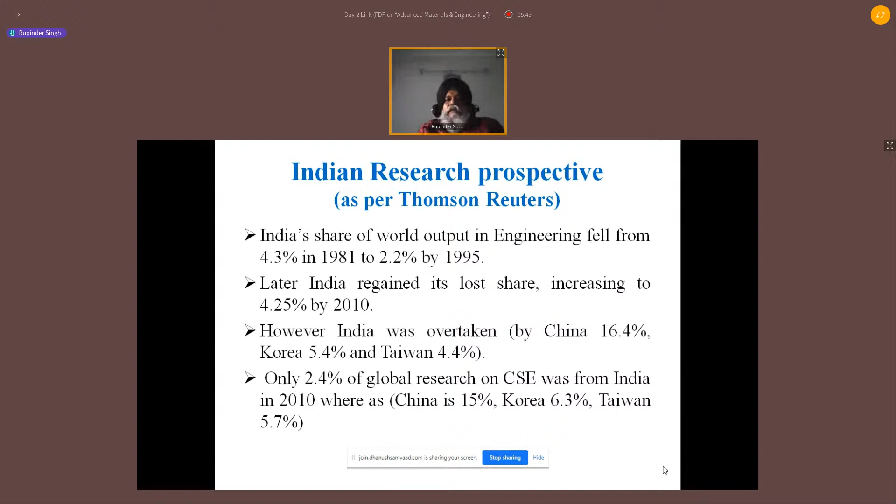Again, the idea here is not to describe a particular technology, but to make it customizable, make it low cost, make it as per the tailor-made customized requirement in our country. Then only can we think of having a low cost technology and compete with the Western world.

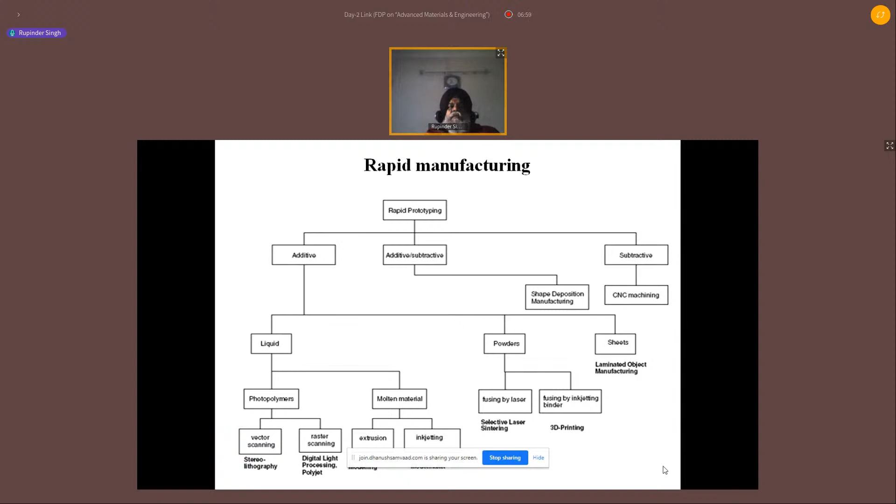So here we start with this basic introduction. Let us, for some of the beginners, understand what 3D printing or rapid prototyping is. This is basically a fabrication method where we are interested in making some physical objects that are constructed by depositing material layer by layer through computer control.

Now, for a layman, this 3D printing is just like a photocopier machine. I have some data in the form of a CAD file. That CAD data I am feeding to this setup, which I call a 3D printer, and I am getting a physical object. This is quite common, and people have been working on different technologies of 3D printing since 1980 in a commercial mode. The development was even 20 years before that, maybe around 1960-67, when people came up with the concept of this 3D printing.

If you simply see the development of this particular technology, it was developed using an inkjet printer. People started using a nozzle of the printer, and in place of one nozzle they put two nozzles. From one nozzle some material was being sprinkled in the form of powder, and from the second nozzle some binder was being sprinkled. Then layer of powder, layer of binder, again layer of powder, layer of binder, so we are getting thickness in the z-axis. So this is how 3D printing actually started.

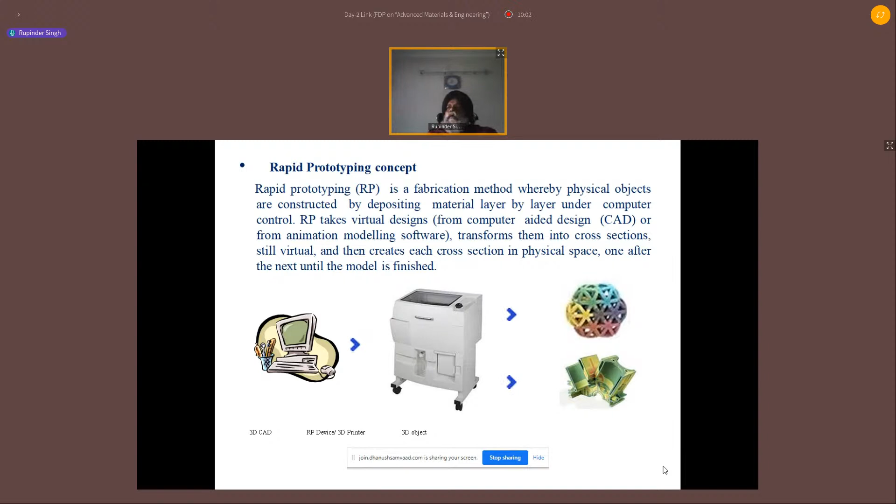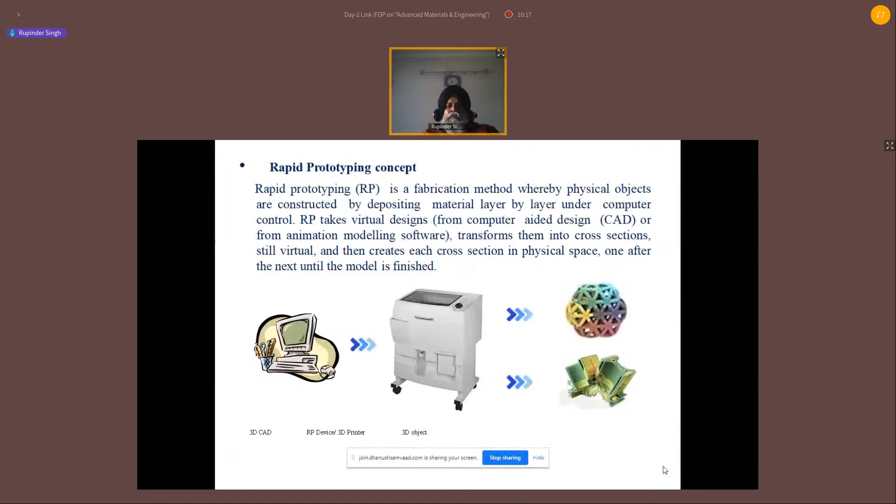So again, starting from the base, I have some CAD file. That CAD file may be an IGS file, maybe an STL file. Nowadays, directly from any commercial software package, maybe CATIA, ProE, Unigraphics, you can take and print a 3D part, depositing materials layer by layer, and then in physical space you can make those products.

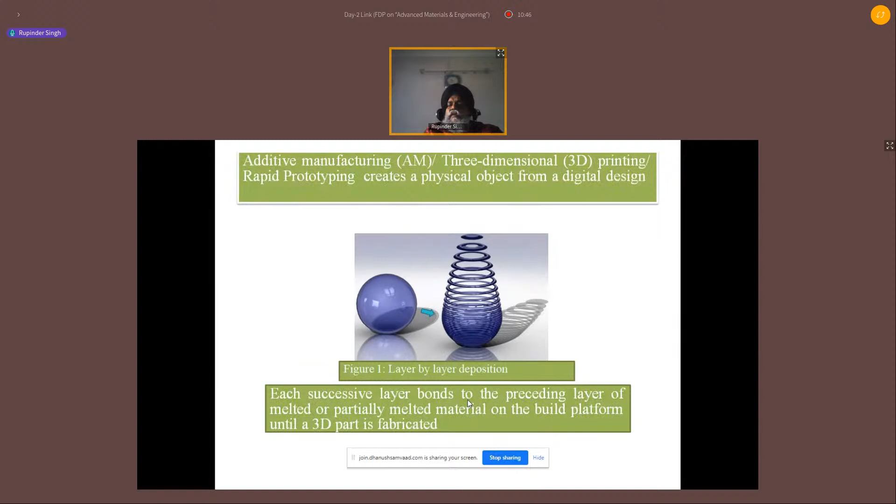This is another diagrammatic representation. I'm making the part layer by layer, and finally some 3D printed component is available. Each successive layer is bonded to the preceding layer, which may be melted or partially melted, or sometimes a glue sort of operation on the build platform, till you get a final 3D printed part. This is a very established technology, and a lot of people have reported different commercial systems. More than 30 such established 3D printing technologies are available.

Now we are interested in adding some special feature to this 3D printed part. Is it audible to all? Am I audible, please? Yes sir. Is it audible? Yes sir. Okay, great.

So in 4D printing, what we are saying is that 4D printing is an extension of 3D printing. Basically, I am interested in printing a smart material, or adding smartness to the 3D printing. So if a printed part is there, and I give some stimulus to that part, and it behaves in a controlled manner, I will call that some sense has been added into this material. Let us understand this with a simple example.

Suppose I take a piezoelectric crystal and apply load over that crystal. There is a change in dimension. Now you release the load, and again it comes back to the original dimension. We can do this exercise a number of times, putting load and releasing it, so the dimension changes in a controlled manner. Because of this property of the piezoelectric crystal, we are using it in typical transducer applications.

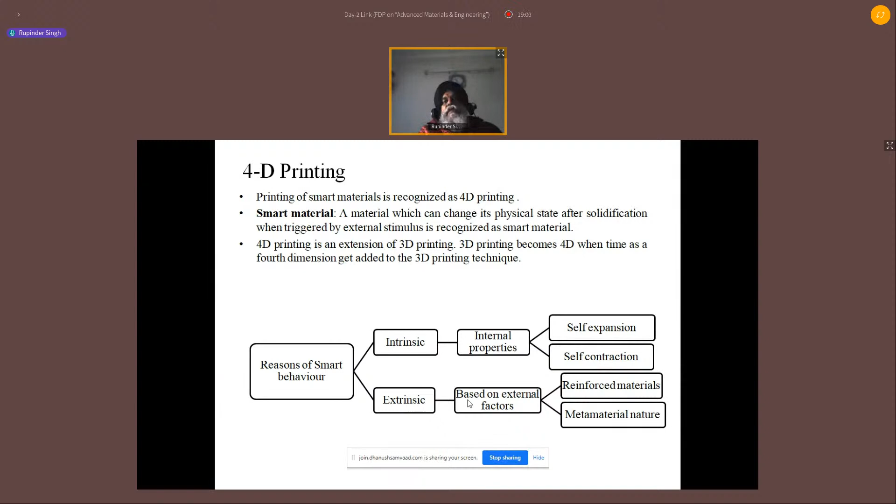Once we use some sort of stimulus, we can also program it. We call it one-way programming, two-way programming, and multi-stage programming. So what is one-way programming? Suppose my material is in state A, I give some stimulus to it, it converts to state B. Now I give stimulus again, it will not come back to state A. So this can be the one-way programming.

Then in two-way programming, it can be like using some electric current. You switch on the current, it goes to state B. You switch off the current, it comes to state A. So this is two-way programming. Similarly, there can be multi-stage programming, like using different stimulus from A to A1, then A1 to A2, multiple stages, and those stimulus help me get some desired property of my functional prototype.

So let us now see with the help of some case studies. First, I will talk about the basics of 3D printing as a case study, and then we will see how we can add some 4D property to this 3D printed material.

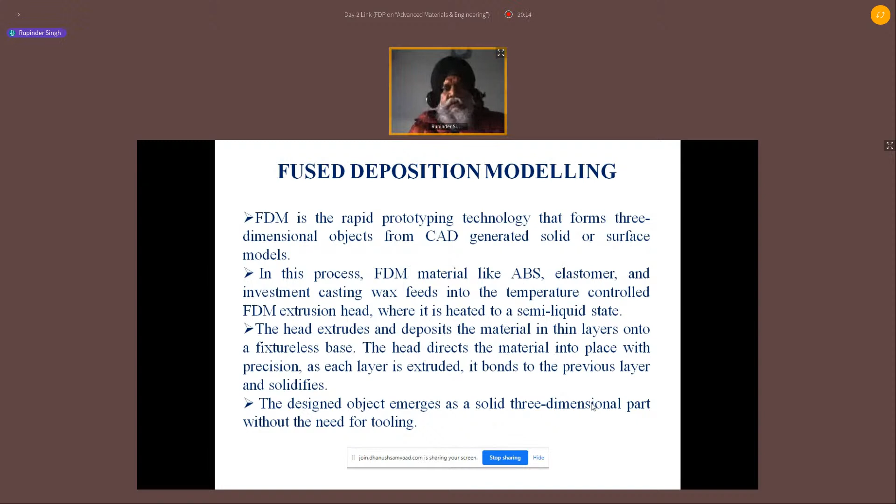So this is the technology that I am trying to discuss with you. This is one of the very common low cost, very cheapest technology, and I suppose this is available nowadays in every engineering college, diploma college across the country.

So what this technology is, this is called fused deposition modeling. Here what we are doing is we are having a spool of material, basically a polymer. This polymer spool is being forced to a liquefier head through some gear drive mechanisms. You can see here are some drive wheels. So I am forcing this feedstock filament of the polymer to enter into some liquefier chamber.

On the inner side of this liquefier we have a heating arrangement, and once I force my polymer to enter into this liquefier chamber, on the other side I have a nozzle where some reduced diameter of the wire is coming out. So at the inlet the diameter of the wire is 1.75, and once it comes out, this becomes normally 0.8.

For a different commercial based printer, you can think of a wide range of diameter of the wires. Normally for the commercial printer this is in the range of 0.5 to something around 2.5, but most commonly used size is 1.75. Of course you can also change this nozzle diameter, and you can think of a wide range of nozzle diameters.

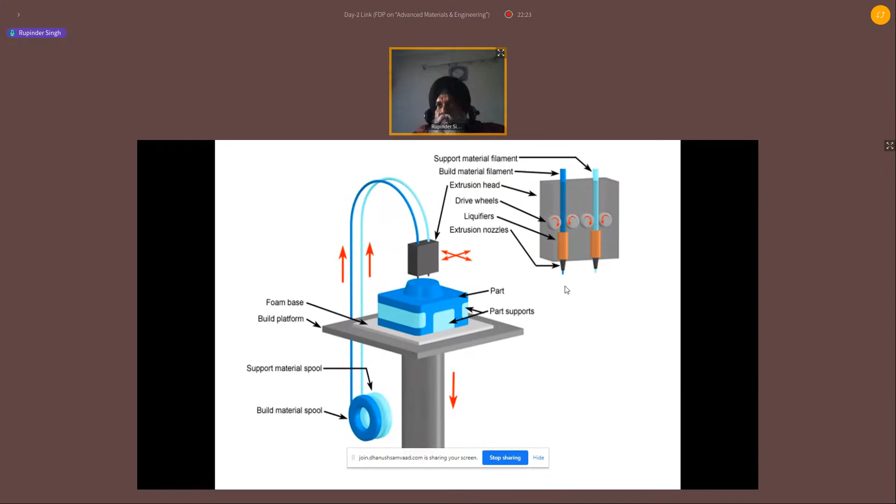But now just imagine if I add some additional property while extrusion to this material through reinforcement, I can think of printing a smart material. So here you can see typical layer by layer material has been printed. Whatever wire is coming out of the nozzle is being deposited layer by layer over this platform. As the part is being printed, the platform is being lowered and people are making it a 3D part.

So here some of you may have a question, why we have two wire spools over here of two different colors. So basically one wire spool is of a build material and another is of a support material. Build material is basically an oil soluble material, and support material is basically a water soluble material.

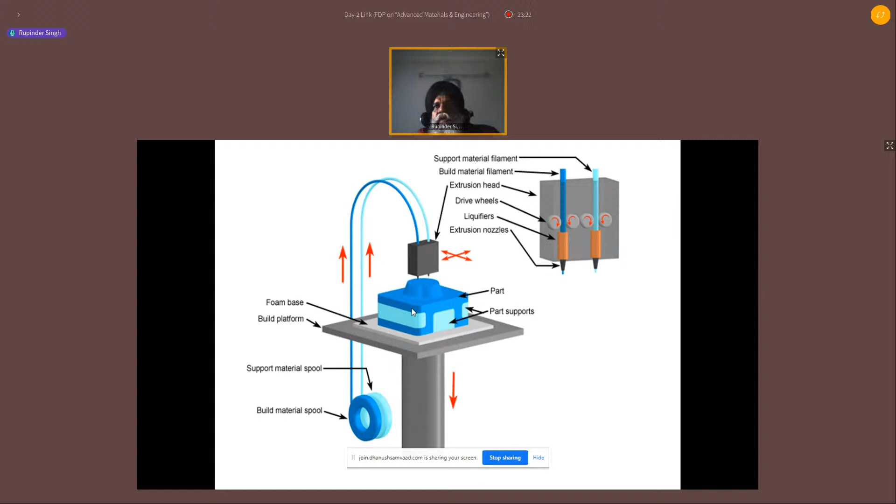So once I am interested in some complex part, once I have a cantilever type situation where I have to support some part, I build that part with a support material, and finally once the part is ready, I just put it in water, make some basic solution, and the water soluble part is getting dissolved into it, so I get a final finished component. That is the basic technology, and that has been developed in the early 80s.

Now we are interested to add some special features to it. Let us understand how. This is the first case study that I'm going to discuss with you. Here what we have done is we are using PLA as a composite matrix that has been reinforced with hydroxyapatite and tricalcium phosphate to make some biocompatible and biodegradable feedstock filament using twin screw extrusion, typically for 4D applications. Now this is a special situation where I am interested in developing some spacer for a biomedical application.

Just imagine there is a patient and some bone part is there. You may know that this bone has a feature that it can grow. Suppose there is some trauma patient, some accident, and there is some loss in the bone part, but it is actually having a capability to self grow. In humans, normally, if some bone part is missing because of an accident, it may grow in maximum up to 6 months to 10 months.

But if we take the typical case of animals, specifically veterinary patients, it may take just 10 to 12 days, so naturally the growth rate is really fast. But suppose there is some loss of the part, and I'm interested in supporting that patient with some spacers. Suppose the bone is like this, and because of the accident some part is short, so as a typical mechanical engineer, I am interested in providing some spacer.

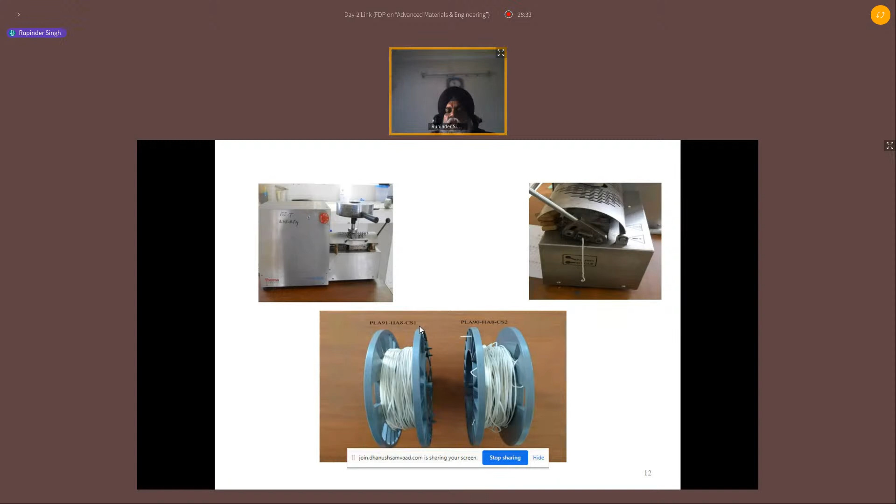You can see here some feedstock filament coming out through extrusion, and I'm collecting this filament on this spool. In this particular picture, you can see 91% by weight PLA, 8% by weight hydroxyapatite, and 1% by weight chitosan that has been extruded. This will be fed to the filament, as shown previously in the FDM process description, and I can print this component for making a really useful part.

So I'm interested in the crystallinity of the material. I am interested in the glass transition temperature. I am interested in the melting temperature of this material.

For example, to understand in a simple way, suppose I purchased two polymer-based buckets, and put one in my bathroom and the second on the rooftop. After just a few days you will observe that the bucket put on the rooftop, under the aggressive harsh environment with different heating-cooling cycles compared to the one in the controlled environment, shows wide deformation, specifically once the material is under the aggressive environment.

So what we want to do with this type of study is: I am using a particular implant or material in particular environmental conditions, like orthopedic or dental. What will be the range of temperature conditions over which it will be working? So we should understand whether this material that I have developed is going to be thermally stable or not. Keeping all these things in mind, we try to understand for different compositions whether this will be thermally stable.

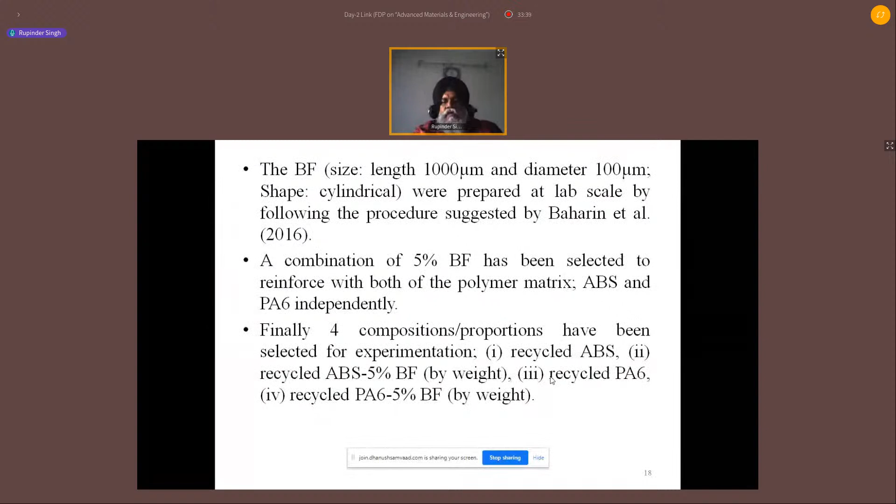So to start with, we selected 5% reinforcement of the banana fiber in different polymer matrices like ABS and PA6, and tried to print some functional parts. Again here you see the same twin screw extruder, then the 3D printing, and this is the printing of tensile coupons as per ASTM D638.

Similarly, we tried to explore the flexural coupons using ASTM D790, and similarly for the compressive parts also.

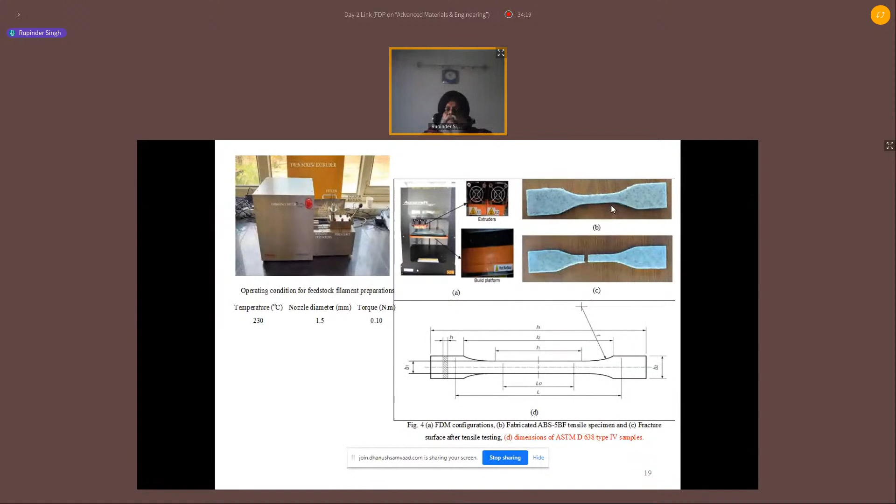For processing of the feedstock filament, some standard operating conditions like temperature, nozzle diameter, torque, we can control. Depending on the different types of reinforcement, I have to do some DOE to manage these input parameters for typical mechanical properties.

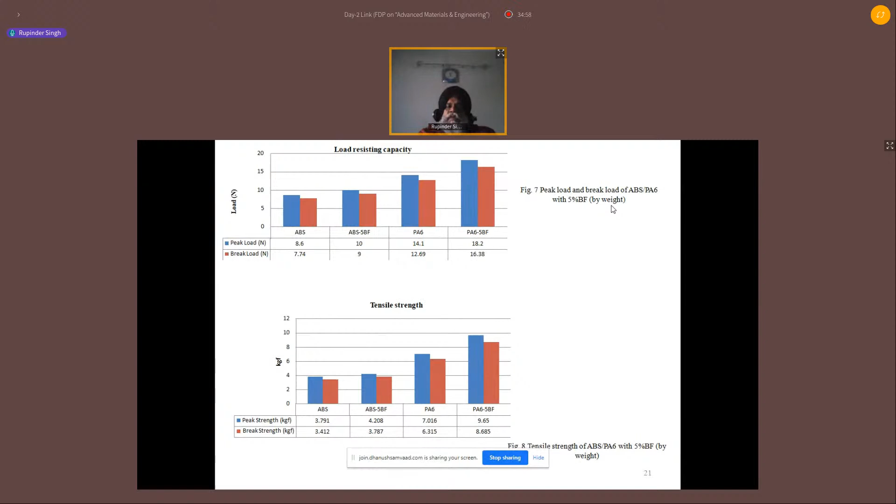Similarly, improvement in load, tensile strength, percentage elongation, and of course controlled porosity—these observations were taken. So why am I showing this? If I am interested, now just consider, I'm interested in

making some roof, right? And for making a roof, I need to put some iron bars, and those iron bars are tied with MS wires, right? So those MS wires are susceptible to corrosion once they are exposed to oxygen and water content.

So we can think of tying those bars using these types of polymer wires instead. We can use it for a fairly good period of time, because there will be no problem with corrosion, and this is much cheaper than those. The second advantage is that the percentage elongation is 13 to 14 times more than that of the MS wire.

In case there is some movement in the earth and a wall is going to collapse, a higher percentage elongation means the material will not collapse in a moment, rather it will have more elongation. So that is the advantage we are getting.

The 3D printing point here is that I am able to prepare a feedstock filament for a 3D printer from the waste. This helps in a big way as regards the waste management of this type of material.

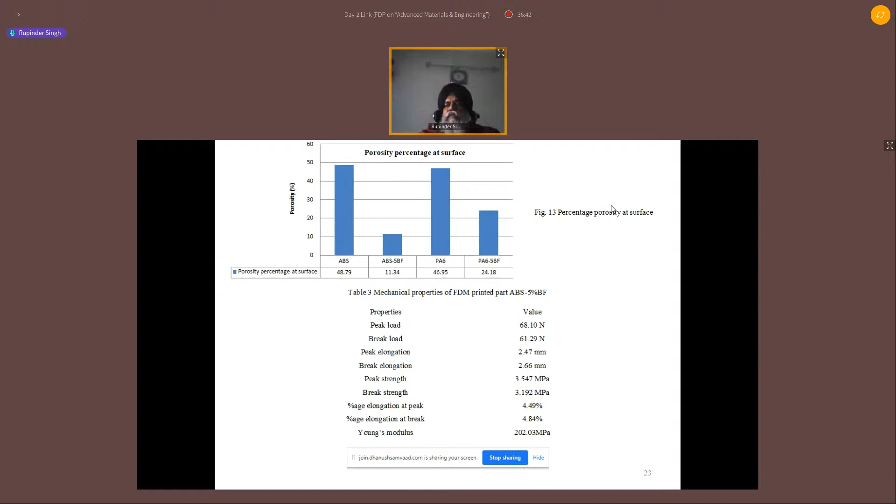Now let us see how we add some 4D property to this material. This was the 3D printed part, now the 4D part. Basically I have to give some stimulus to the material, and with that stimulus the material behaves in a controlled manner. With the stimulus I can add on some property, switch the mode of the material, do the reverse, or do it in steps.

The stimulus can be in the form of an electric field, it can be in the form of load, it can be in the form of light, magnetic field, some chemical energy, or some thermal energy.

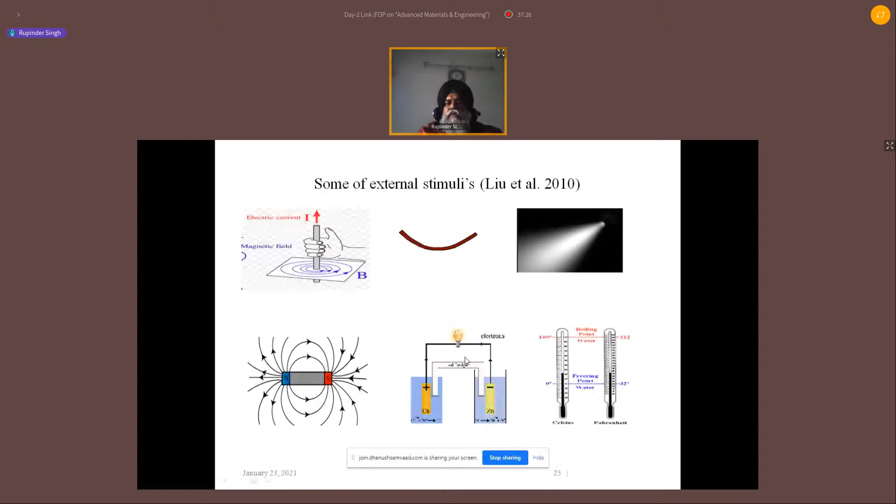Let us see one typical example. This is the case study we performed with one of our collaborators in Italy, Professor Fernando. We are interested in developing a particular sort of cabin for some place in Canada and US, where the outside temperature is -30, and we are basically interested in replacement of the wooden structure.

Because of the depletion of natural resources, we are no longer interested in cutting more wood, so we want a situation where we can replace the wooden structure. Number one. Number two, we are interested in self-assembly applications, in making some tiles. Number three, we are interested in recycling of the polymers. Keeping these three things in mind, we try to develop this case study.

What we actually do is put the polymer into a barrel, fix a temperature, and apply a load. At a particular temperature and load, the material is forced to move through the barrel, and on the other side there is a small opening. How many grams of material come out in 10 minutes is called the MFI of the material. This is one of the basic rheological properties, measured in grams per 10 minutes, and it is required for running the material, composite, or virgin polymer on a 3D printer.

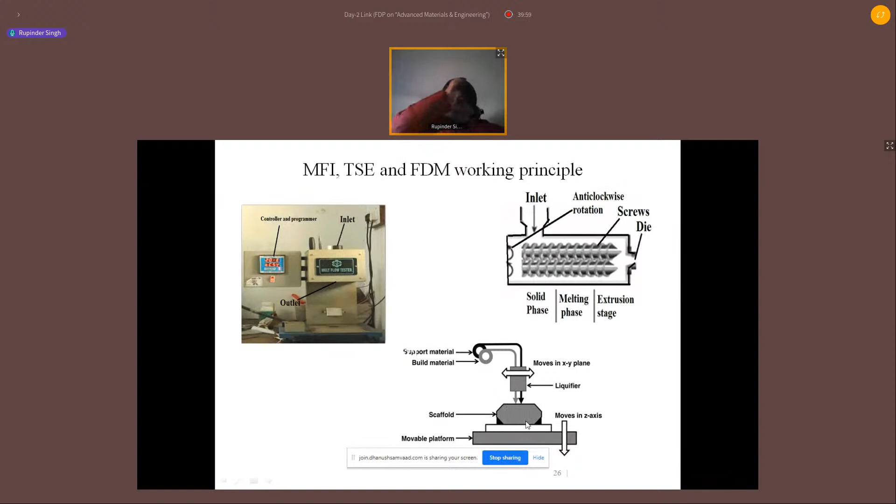Now the actual case study. In our office cabins or even residential places, we used to go for PVC paneling. PVC gives good strength, but the problem is biocompatibility.

Once the useful life of that PVC panel is over, like it is not able to give good color or luster, we throw it outside. This adds to the plastic solid waste, and of course it is not biocompatible.

So what we try to do is procure a PLA which is biocompatible, and reinforce it with PVC which is not biocompatible, then add some wood dust which is waste from a sawmill in place of wood. To add some smart property and self-assembly feature, we add iron powder into it, using Fe3O4 magnetite powder. We print this material layer by layer, preparing 4 different feedstock filaments, and develop some sort of tiles.

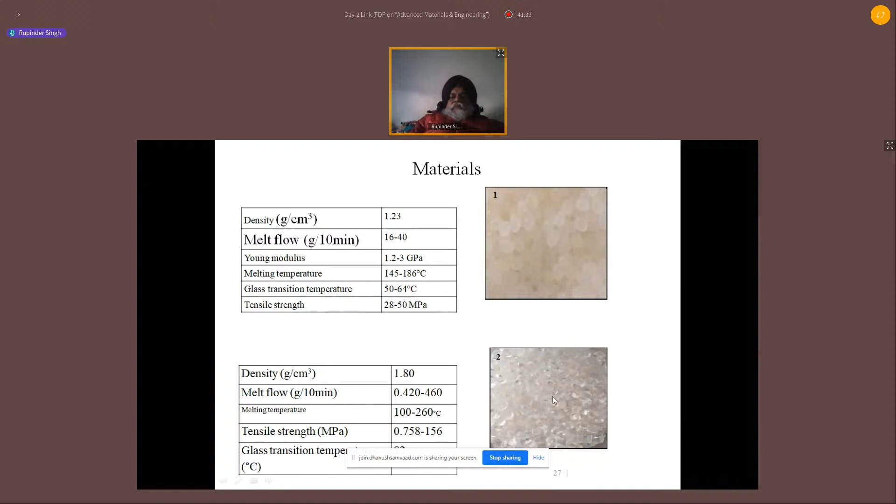So those tiles I am interested to 3D print and use in a cabin for self-assembly application. In this particular picture you are seeing the granules of PLA, some PVC, some magnetite powder, and some wood dust that has been used.

The reason I have already explained: PLA because of the biocompatibility, PVC to address the waste, Fe3O4 for the magnetic properties, and wood dust basically for its good thermal insulating property.

So we tried to observe the different compositions, and then we worked on different torque available on the extruder, then their temperature, then the load condition. We used a DOE and prepared different feedstock filaments. Then we did a VSM, vibrating sample magnetometry test, to understand whether my material is really having a good magnetic property.

Just imagine what I am trying to do is print a rectangular tile. Imagine I have a metal frame, in that metal frame, which is in the form of a wire mesh. On that wire mesh, once I give a current, of course less than 12 volts.

So some electric field will be there. Because of that, there will be some magnetic field. Because of the magnetic field, it will be having an attraction. For that attraction, I am trying to print a layer by layer tile, with the lower layer attached to the wall having a high composition of Fe3O4, then the next layer with more composition of wood, then the next layer with composition of PVC, and the top with PLA.

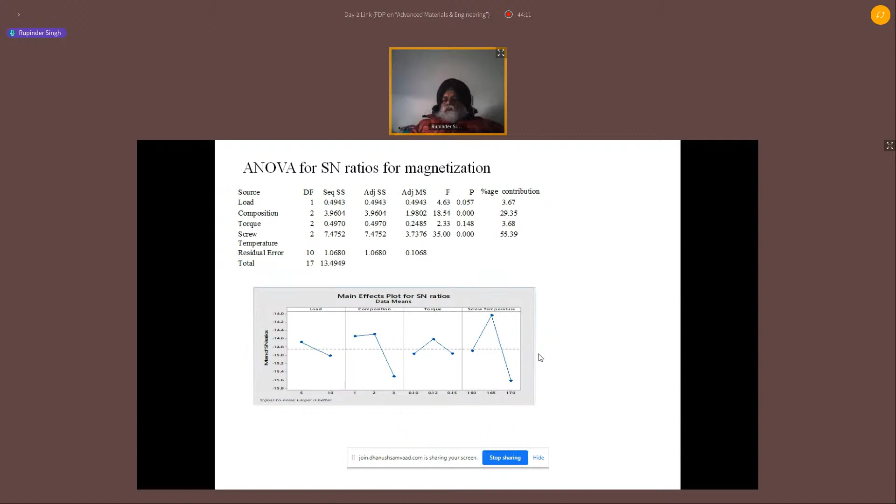So these type of basic observations we did for the selected composition of the material, and then we did some ANOVA analysis, a typical statistical tool, to understand which parameter is more contributing for a particular property. Then some SEM and EDS analysis was done.

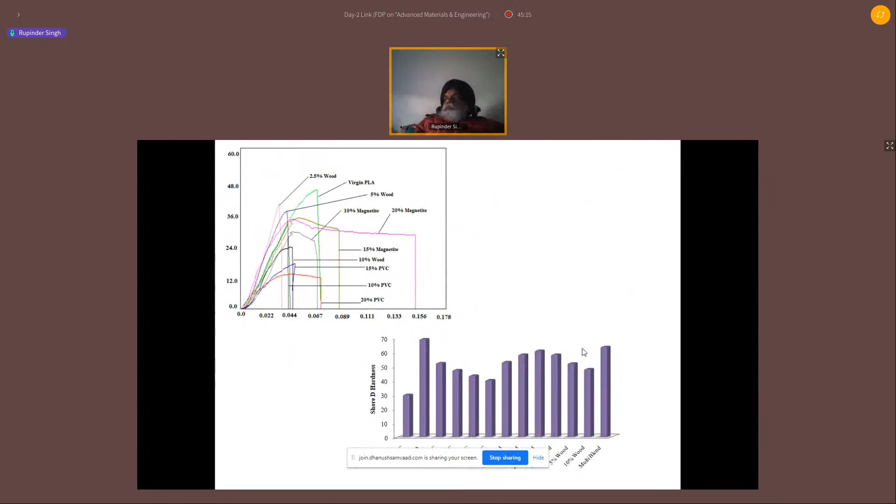We also tried to observe with this type of reinforcement, what will be the peak load, peak elongation, break load, break elongation, peak strength, break strength, percentage elongation at peak, percentage elongation at break, then Young's modulus, and of course the modulus of toughness, by looking at the area under the curve, then their surface hardness in form of Shore property, their thermal stability, and different BH curves for different types of materials.

So what we observed is we were really able to develop multi-blend material with respective magnetic, thermal, and mechanical properties. And of course this can be really printable, and those printable tiles, once actuated through a magnetic field, show the self-assembly feature. So this is one of the simple ways I can make my 3D printed part smart, and it can behave as a 4D material.

Similar to this, we try to reinforce different types of material into the polymer matrix. In this particular case, we reinforced graphene into ABS, and once we put different compositions of graphene into ABS, we tried to see their rheological property in terms of MFI, then their thermal stability analysis, and how they behave with different reinforcement in terms of effect on heat capacity.

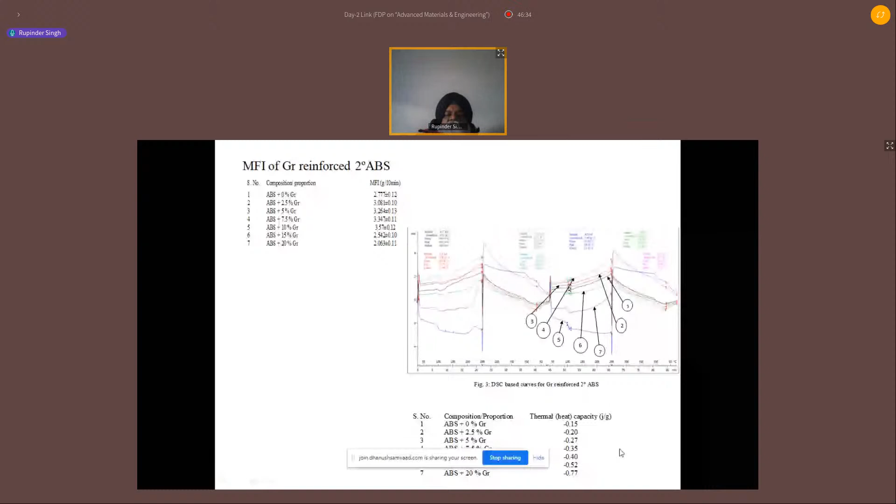You can see with the reinforcement of graphene, the heat capacity is basically increasing. And then of course we try to see the effect on their magnetic property in form of coercivity, retentivity, and magnetization.

Right, so both in positive and negative, basically changing the field of the magnetic field, we are trying to see this. Based upon this, we observed that any polymer with these types of reinforcement can be made as a 4D printable material.

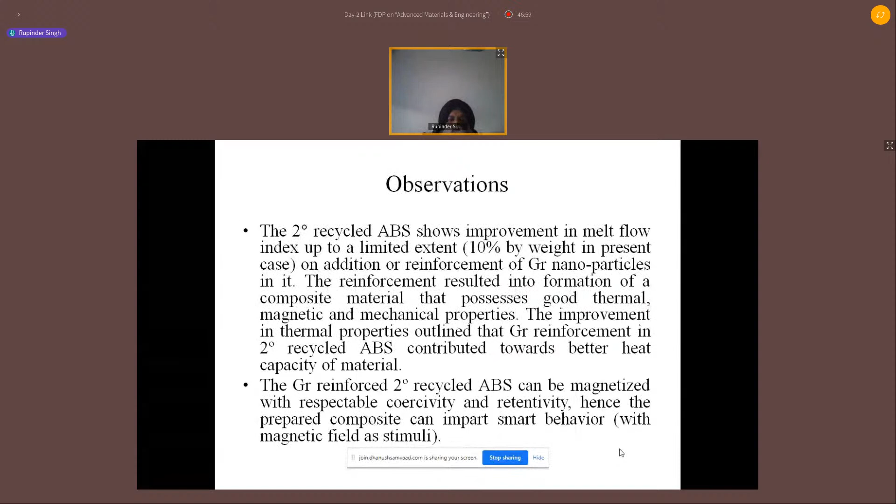Now this is another case study where we try to put barium titanate in PVDF for typical 4D applications. As per the literature, graphene, if reinforced up to 2% in PVDF, gives good results.

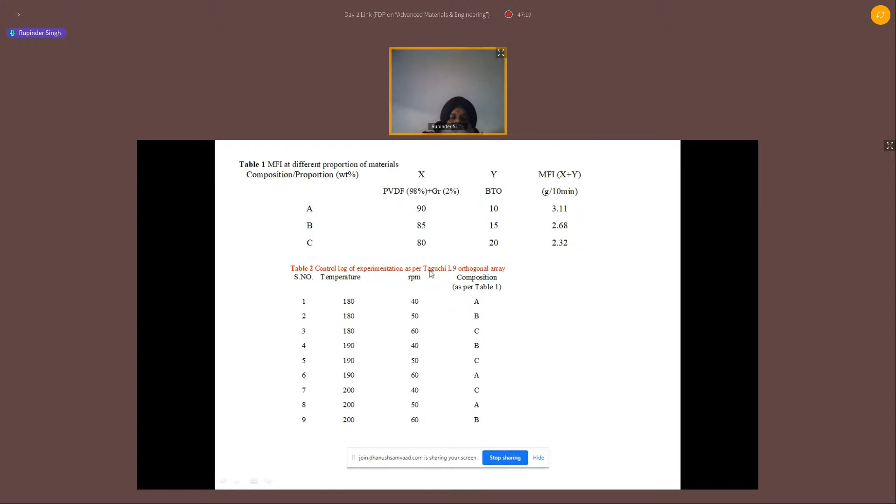So with this proportion, different amounts of BTO, barium titanate, were reinforced, and we try to prepare the wire, and then see their peak strength, break strength, modulus of toughness, stress strain curve, thermal stability, and their D33. We were able to get 20 picocoulomb per Newton as a piezoelectric effect.

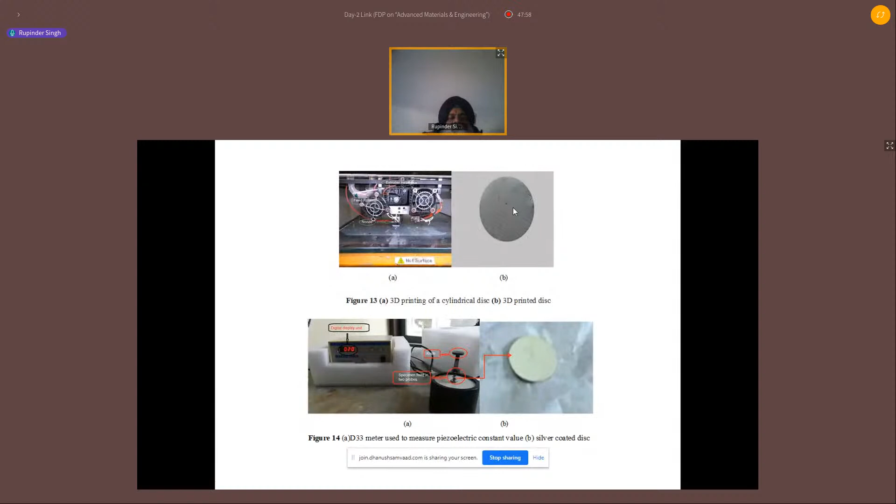So this can really help in developing some transducer type applications. This is again a way where from the waste I can actually make a useful product. So this is another case study for making some 4D printable properties of the material.

In this particular case, we have put ZnO nanoparticles into PLA, and we try to tune the thermal, mechanical, morphological, and shape memory properties.

Now if you see the stepwise process, I have some thermoplastic granules of PLA, and ZnO nanoparticles were reinforced into it. We prepared the feedstock filament, which was then processed for different thermal properties.

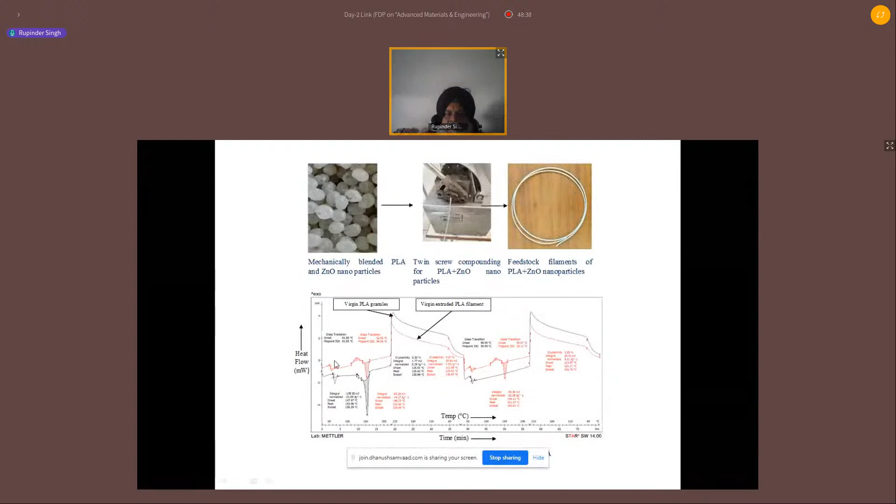So I can see what is the thermal property without reinforcement, then with different levels of reinforcement—1%, 2%, 5%—what effect it has on thermal stability, whether it is improving. One important thing we did was make a U-shape component, and try to see the effect of stimulus like water and temperature.

So what we observed: once we made this U shape, we put it in water for 5 hours at a temperature of 25 degrees Celsius, and after 5 hours we removed it to see the recovery.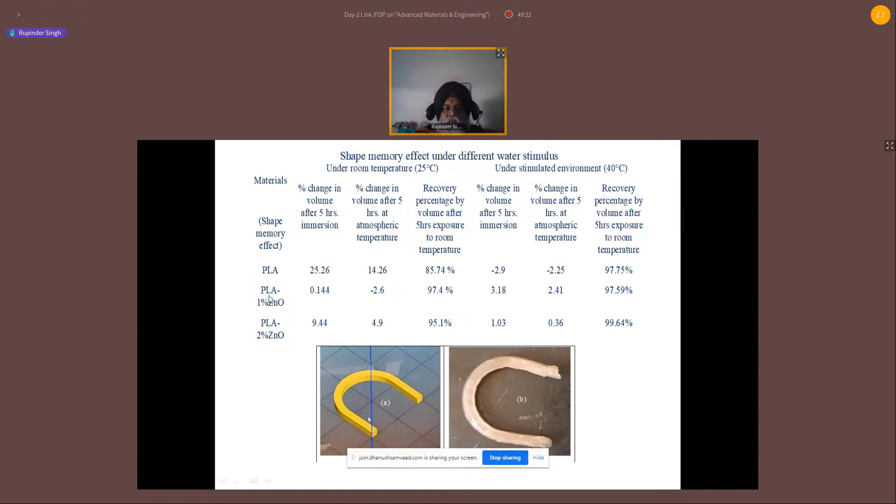With 1% ZNO, the recovery was 97%, meaning the U becomes V, and once you put it for some period, it regains its position.

What we observed is there was an effect of temperature. At different temperatures, this behaves in a different manner—like at 40 degrees, it was behaving differently.

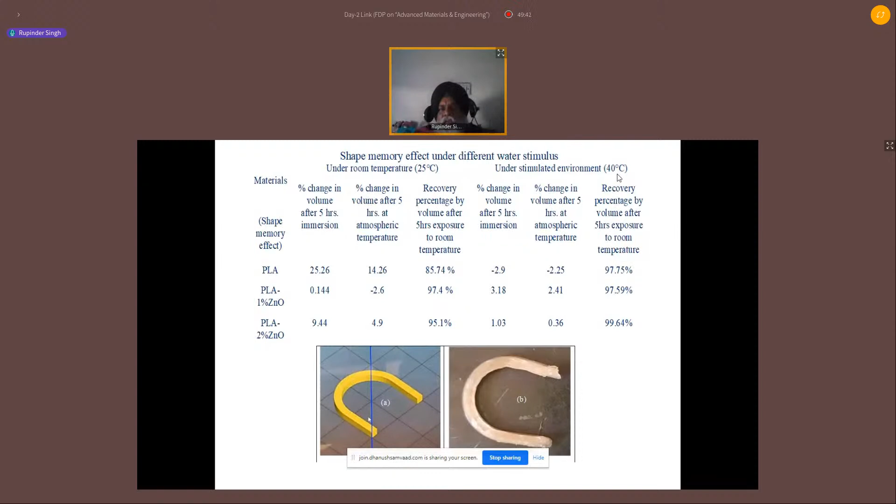Then we try to see this material's behavior at very low temperature, and at the glass transition temperature, and we observed that 99.6% recovery is also possible. This can be really helpful for me as a 4D material for some typical sensor applications.

So we try to correlate why this material is behaving like this. That has been correlated with the porosity percentage, and we observed that the porosity was much controlled at those particular situations.

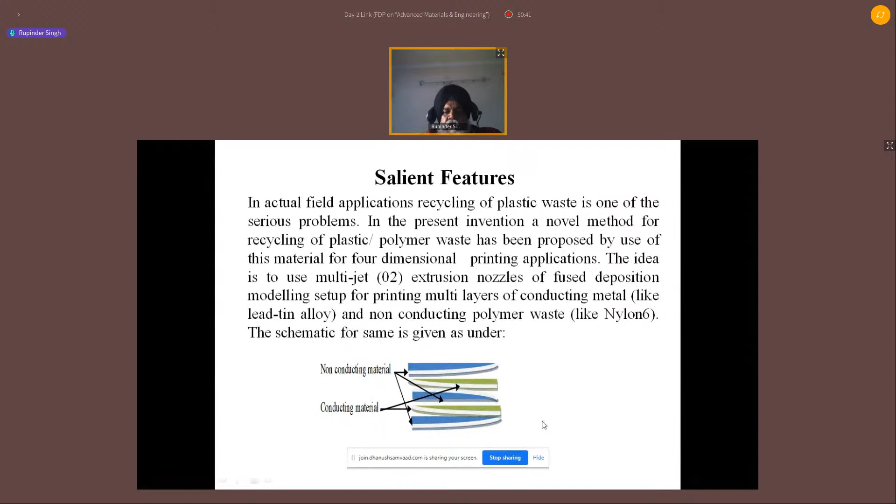So what I'm trying to do is, on the conducting layer, I am making electricity move. Suppose the electricity flow is in this direction, so there will be north and south. Then in the second layer again there will be north and south. This south and north will have attraction, so the part will have compression.

If there will be a south, and I just change the direction of the current, there will be a repulsion. So using the basic principle of physics, and just by changing the direction of the current, I can make some 3D printed material really smart for some sort of a cavity filling type structure. I will show that example.

Similarly, we can think of using these types of smart materials for some hybrid applications. Here, basically in the USM process, we try to hybridize some applications—in typical USM we can use the transducer developed with the technology I just explained in place of the present piezoelectric transducer.

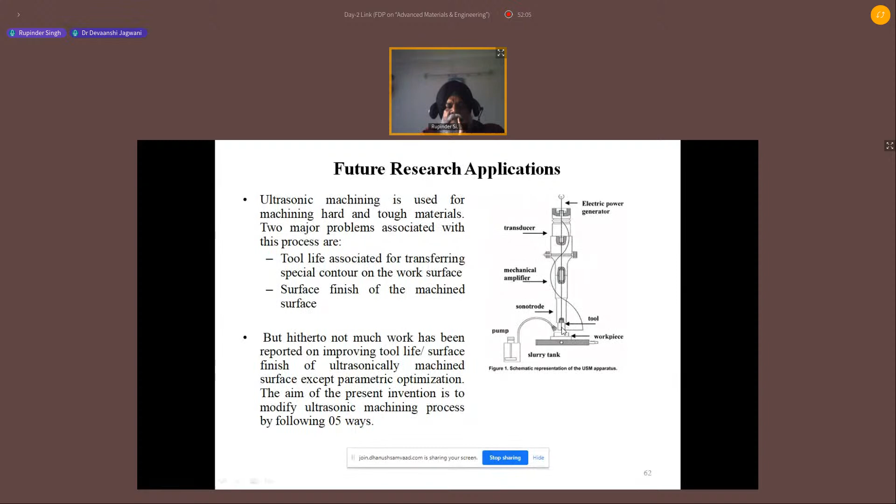Here's the tool we are using in USM for the drilling of this surface, normally made of metallic material. What I can do is 3D print this, and here you can see I am doing the combination of broaching as well as drilling.

What I have done here is this protruded portion, which is going to be in the drilling part, is made by 3D printing. Up to this region is a rough zone, then semi-finishing zone, and then the super finishing zone that has been 3D printed.

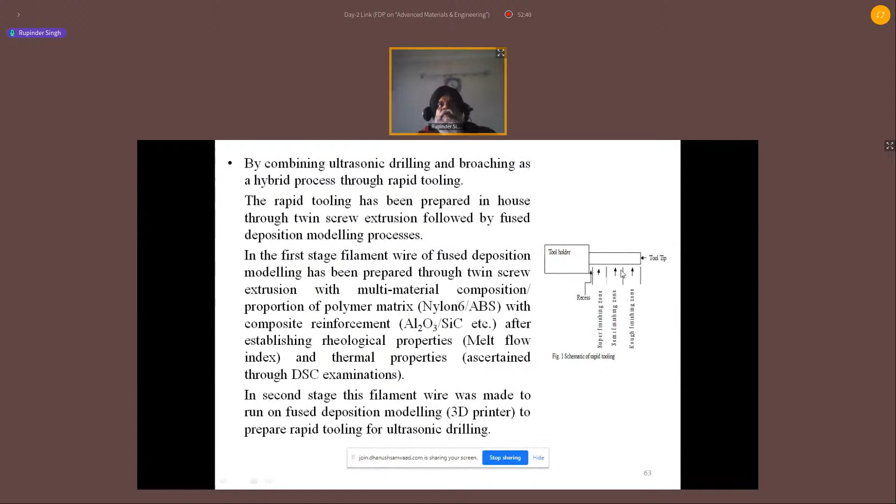So once this ultrasonic drilling is there, it will do the combination of drilling and broaching. So this is basically going to be a hybrid process. That is the possibility with this type of smart materials.

Then one thing more we can do: in typical 3D printing applications, my nozzle is normally circular in nature, so once there is deposition of material, it leads to some elliptical part. Once these ellipses are placed this way, there is a staircase effect and an air gap, which causes a poor surface finish.

What we can do is think of some smart material based nozzle, which can be polymer or metal. This happens basically because of the Barus effect. I can think of having a smart nozzle where, because of the Barus effect, it can automatically change its profile.

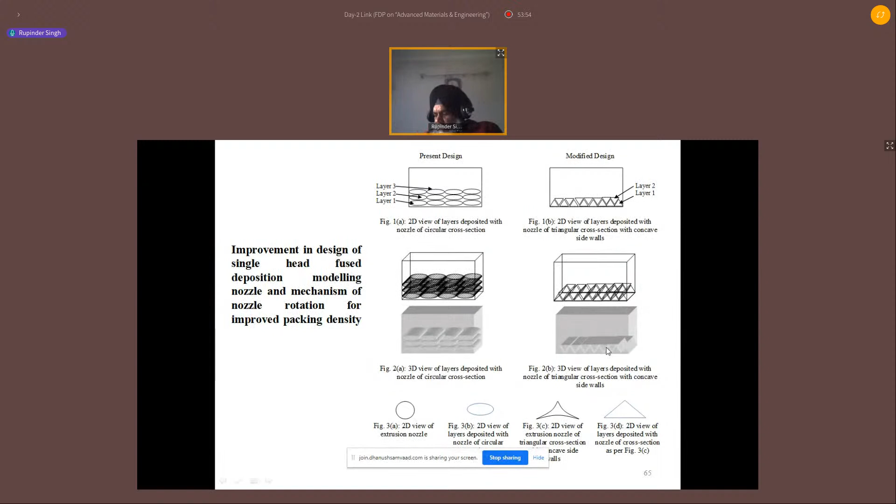Suppose the profile is like this, giving me output like this, so I get a triangular shape layer deposition. Then in the second layer I put the reverse direction of layer deposition. So there is very little air space, and the surface finish will be much better. This can really be a smart nozzle that we can make.

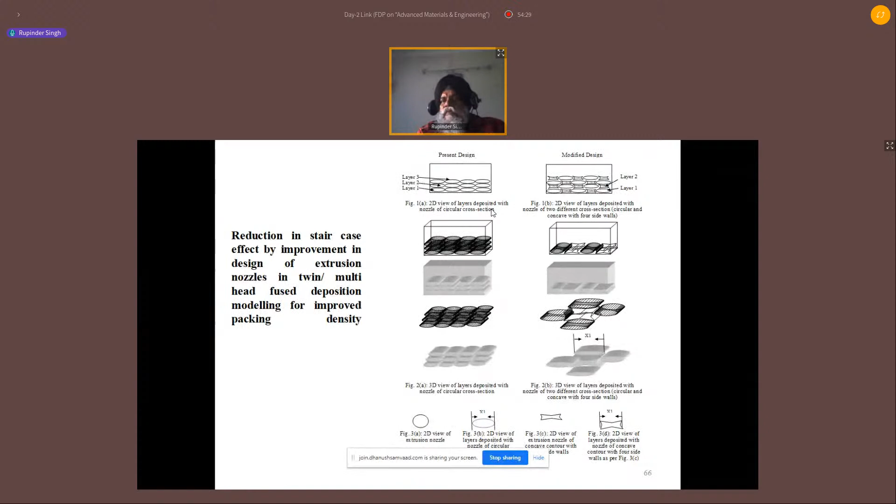Similarly, we can think of using multiple nozzles for 3D printing, where one nozzle gives me output like this and the second nozzle gives output like this. Once they are assembled, there will be less air space. So we can think of different applications of these smart materials for a number of uses. That's what I wanted to share with you.

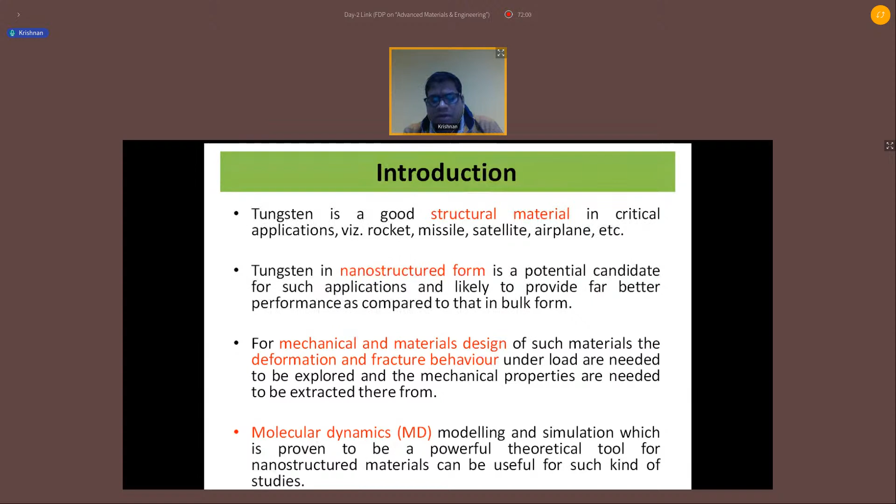So before going into the details of molecular dynamics, we need a little bit of knowledge on mathematical models. As you know, there's the multi-scale approach: static, dynamic, discrete, continuum, deterministic, and stochastic. So we have focused only on deterministic - MD is a deterministic technique, meaning no randomness is associated. For stochastic, that means for nanofluids, many people are using stochastic modeling for randomness and for Brownian dynamics simulation.

And we have also developed in our lab different multi-scale approaches, using molecular dynamics as well as finite element method. So one length scale is millimeter and another is nanometer. When we have developed any composite or any alloy, we have to develop using a multi-scale approach spanning nanometer and millimeter scales. So we have also developed a multi-scale method in our lab.

And some views on modeling - a good model means modeling is basically imitation of real things. Many great scientists have also said something about modeling, but modeling is that which represents some object, some phenomena, as simple as possible. So if the model is simple, that means you have to capture the important behavior also of any system.

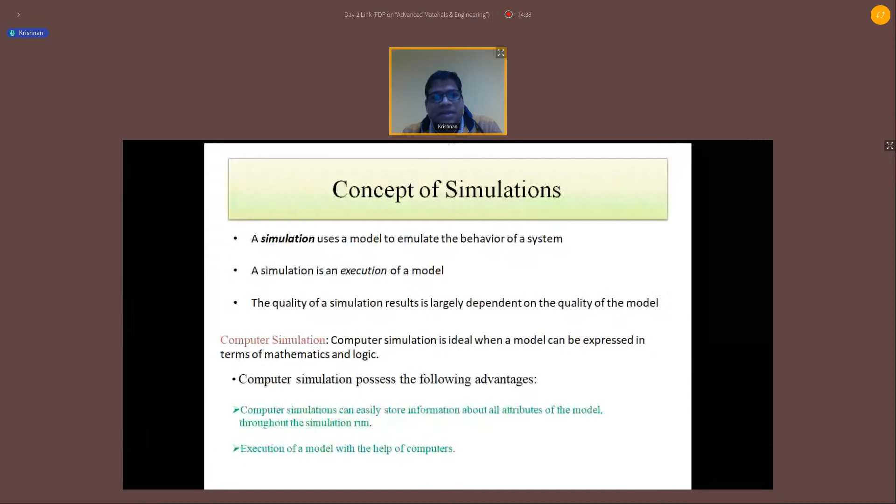So we have to check the limitation - the size of the system is very much important. The number of atoms - if the number of atoms is more, the execution of the program will take more time. So we have to first design a system with a number of atoms within a very limited range, meaning you have to run the program within a very short period of time. If you're doing it on a supercomputer, then that is no problem, but that facility is not available right now.

So basic simulation terminology is: discrete system, continuous, static, dynamic, deterministic, and stochastic.

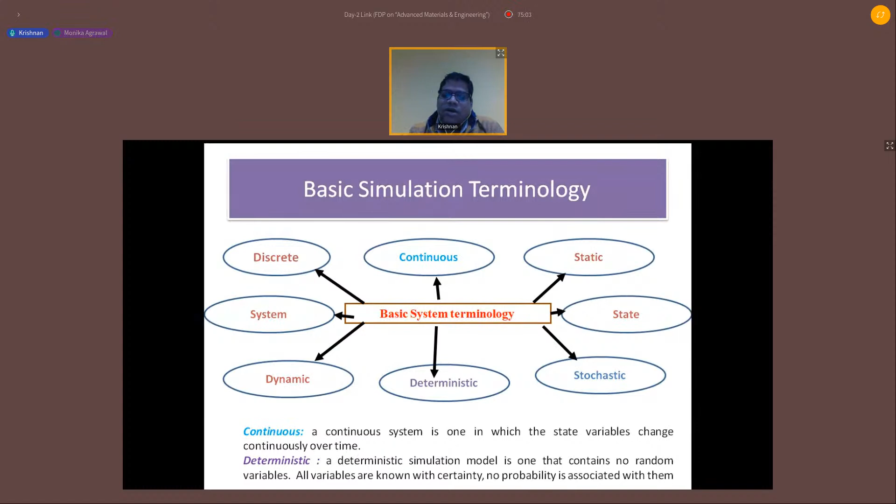A deterministic simulation model is one that contains no randomness variables. All variables are known with certainty, no probability is associated with them.

The molecular modeling approach is atomistic modeling. We are basically doing atomistic modeling, and many people do ab initio first principle calculations using DFT. The goal of materials modeling is to predict different properties, particularly when experimental determination is difficult or impossible.

We predict how a system responds when external variables are imposed. We propose a model and simulate to predict system response. Validation is very much important - whether the experimental and your simulation result is valid. You can also validate through literature.

Some advantages are: studying material properties by effect of external variables, well-controlled experiments, prediction capability, and cost effectiveness.

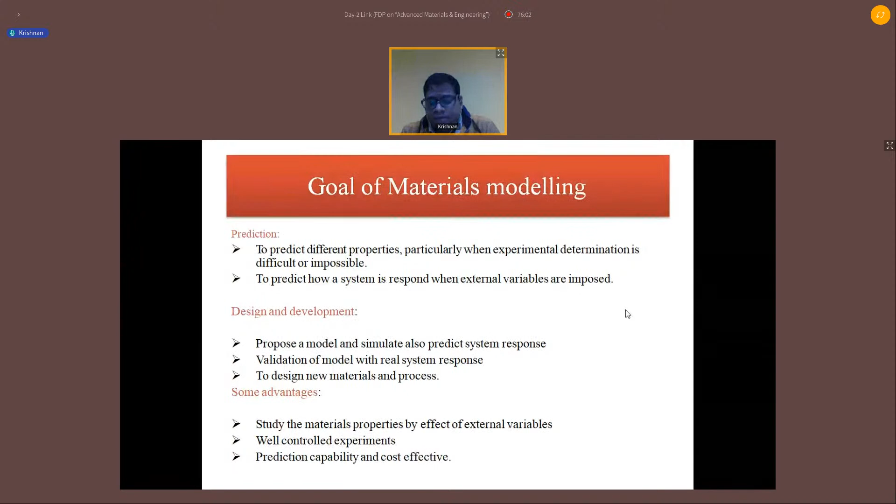Now we come to molecular dynamics. Molecular dynamics is basically a computer simulation technique by which one generates the atomic trajectory of a system of n particles by numerical integration of Newton's equation of motion for a specific interatomic potential with certain initial and boundary conditions. So all of this comes together in this definition - a specific interatomic potential is needed for doing molecular dynamics, because we assign some initial position and velocity.

Time is not discrete, but to simplify the model we can discretize time within femtoseconds or picoseconds. So with progressing time, we can change the atomic position and velocity, and we track the position, velocity and temperature. That's how we calculate using the molecular dynamics technique.

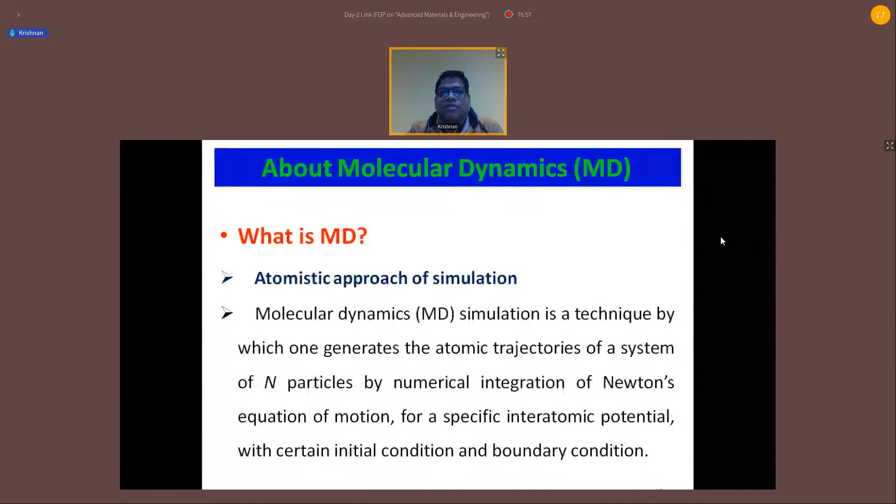The MD implementation part is very important. First, as I said, we assign initial particle position and velocity, and a specific ensemble - here we are using the NVT ensemble. An ensemble is basically a collection of microstates corresponding to a macrostate.

In initializing the MD implementation part, the specific potential is also important. We are using the EAM potential - embedded atomic method potential. This potential is collected through reliable sources like NIST or sandia.gov. You can also find other reliable sources, but if your potential is wrong, then the program is wrong. Otherwise you can develop your own potential using DFT.

After that comes force calculation using current position, and integration and updating of position using velocities after progressing time. This is the run part.

Another part is the analysis part, with 6n variables - first x, y, z as 3 variables, and 3 momentum variables, so total 6. Then we average the properties, and after that comes properties calculation and state of matter.

For the initial portion, you have to design the geometry and also the lattice parameter. If the lattice parameter is available in literature, it's okay, but if it's not available for nanostructured material, then you have to calculate the lattice parameter.

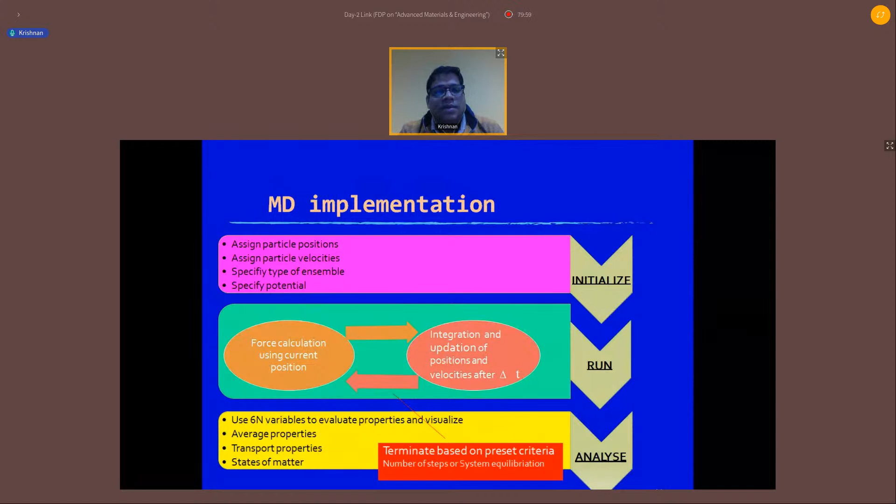Now coming to my tensile model - this is analogous to the real experiment, with thermal equilibration. We are using the NVT ensemble, which is basically a collection of microstates corresponding to macrostates. We are using the Nose-Hoover thermostat, which is also a well-known thermostat in MD modeling.

NVT means number of atoms, V is volume, and T is temperature. The interatomic potential is the embedded atomic method potential, time step taken is 1 femtosecond, and time integration uses the velocity Verlet algorithm, which is the default setting in LAMMPS. So there's no need to change to another method like leapfrog - time integration for LAMMPS is set by default to the velocity Verlet algorithm.

The simulation scheme is like testing with a UTM - the last 1/6 portion is fixed, the main deformable part is the middle 1/4, and the first 1/6 part is the moving part. Using displacement velocity, we changed it to 0.1 to 1 angstrom per picosecond.

You have to change it if you think that you can change it, and you can see the properties, how it is dependent on the velocity, displacement velocity, or not.

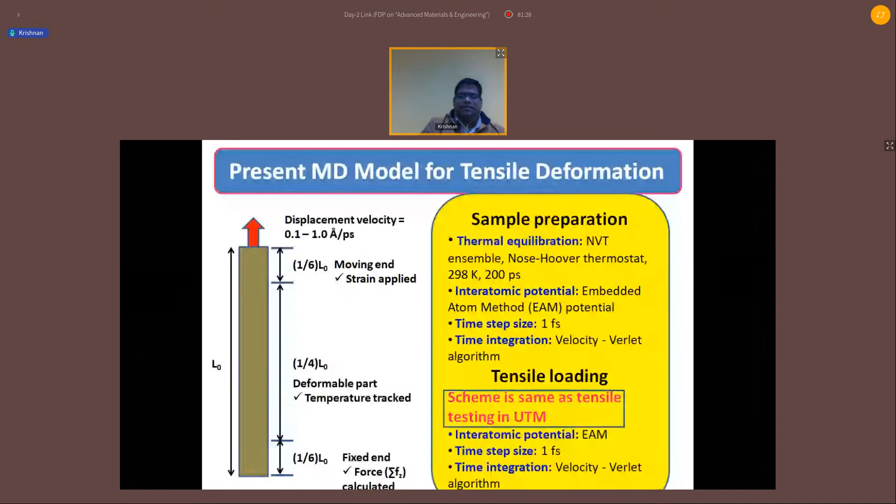Another method is nanoindentation. That method is very early, discovered in 1992 by Oliver and Pharr, and we are using the rigid indenter. The beauty of the rigid indenter is there is no interaction between the indenter and the surface. We only consider that it can indent the surface, and after the localized indentation, we can calculate the property using Pmax, that is maximum load by area.

Area calculation is different for the nanoindentation technique, because in tensile deformation we can calculate percent elongation, Young's modulus, and yield strength also. But for simple indentation, we can predict material properties like hardness and Young's modulus itself. So nanoindentation is a very versatile method.

We are using single crystal analysis here, and another team in our lab is working on polycrystal. So the method is very versatile. We can calculate, using rigid indenter, the displacement-controlled nanoindentation technique.

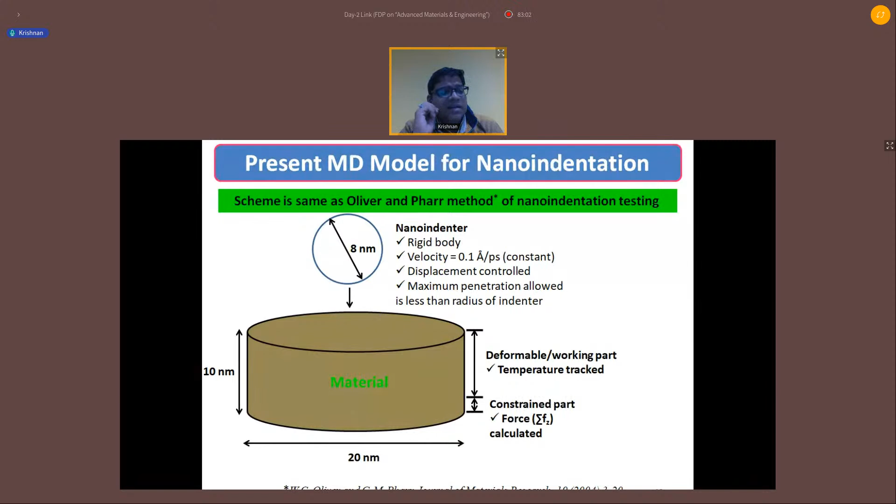Maximum penetration allowed is less than the radius of the indenter, and after that we calculate the radius. After radius calculation, we move to the next slide, that is stage thermal equilibration using Nose-Hoover thermostat. First part is the loading part, another is holding, and after that the unloading portion.

From the unloading portion we calculate the area, then the hardness, and after getting hardness in nanoscale, we calculate Young's modulus, that is basically S over root(pi/2) into beta into root A. Before the Young's modulus calculation, we have to check the critical height of the surface, that is H max minus epsilon times P max by S. That is basically a well-equipped equation designed by Oliver and Pharr.

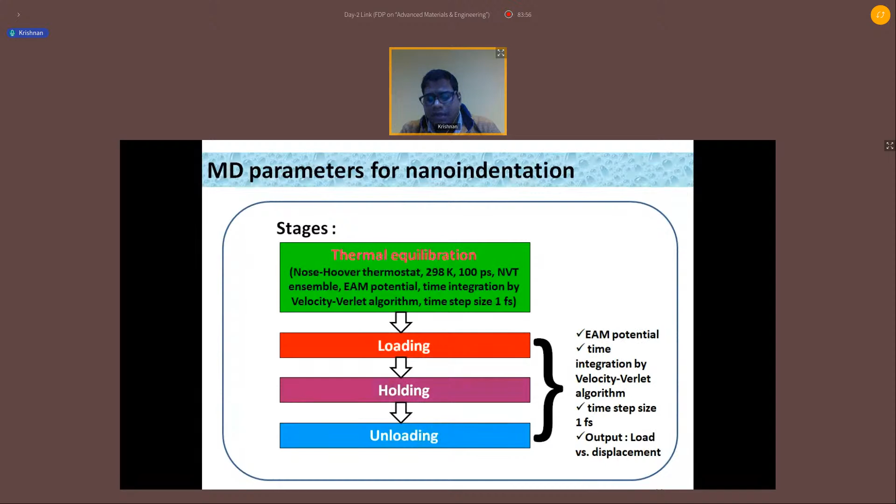The Young's modulus value is basically the effective Young's modulus value, because if we multiply by the Poisson ratio of the indenter, that is rigid indenter, 1 by infinity equals 0, so no need to add. If we add the material's Young's modulus, then the Young's modulus is quite less.

So that means here we present 1170 GPa, and it may be reduced. So we can say this Young's modulus is a reduced Young's modulus.

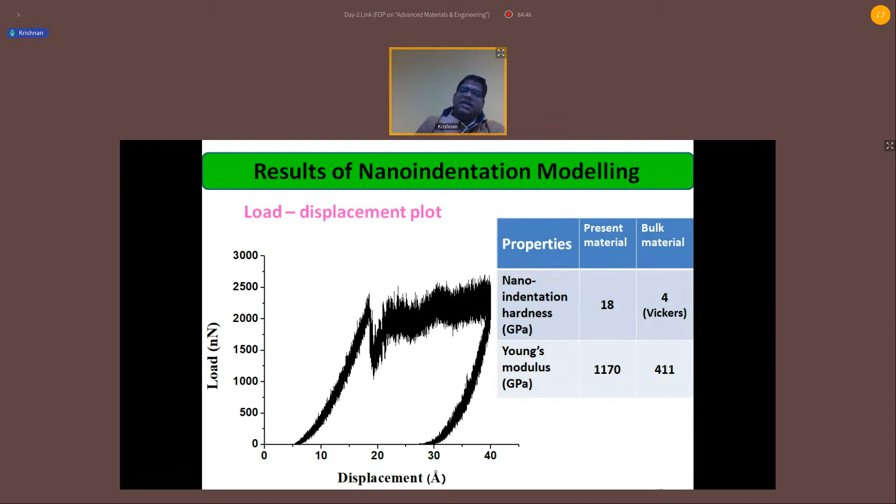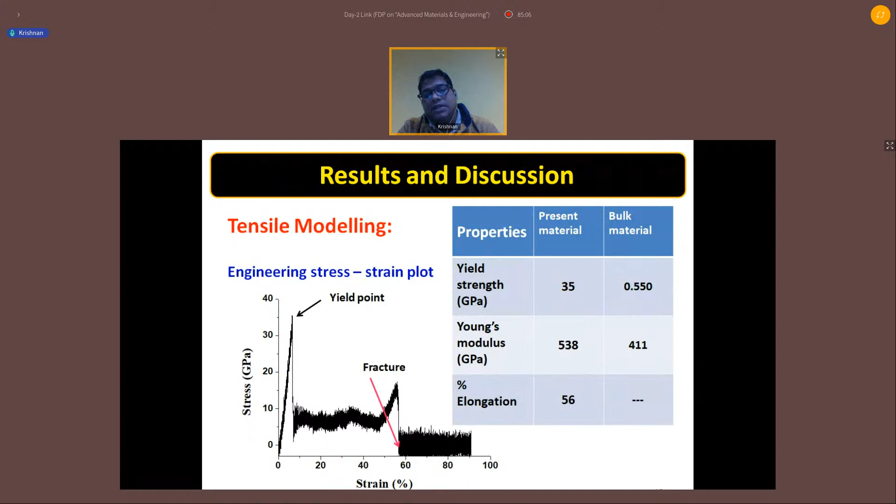This is the configuration using OVITO. The middle portion is indentation, where we can actually indent. Using OVITO, we can find out the configuration.

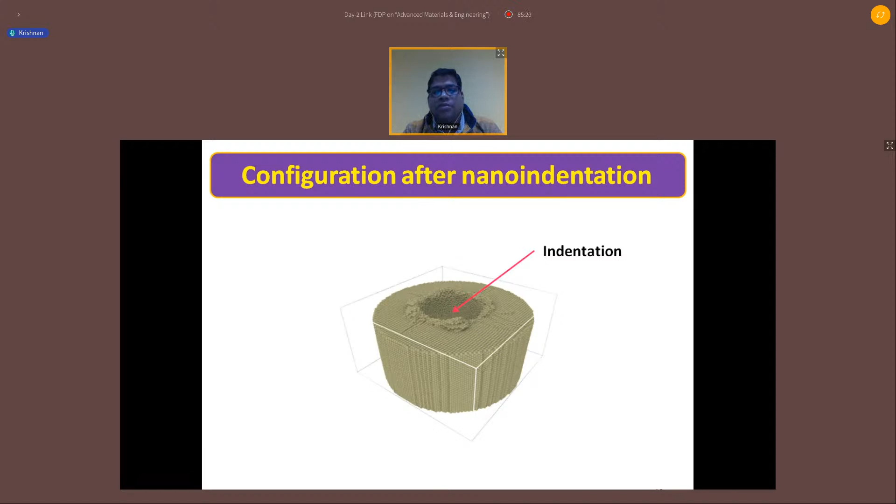And this is the conclusion. Bulk deformation under tensile loading and localized surface deformation have been modeled under the framework of molecular dynamics of tungsten nanocrystal to extract the bulk and surface mechanical property. The estimated values have indicated the dominant role of surface effect of nanoparticle in enhancing the strength and hardness by several orders of magnitude.

When we design the program, we have to check and nullify the surface effect of the nanomaterial. We are using periodic boundary condition, and another boundary is shrink-wrap boundary condition, a non-periodic boundary condition, which is also used. For bulk material, we are choosing periodic boundary condition, which is very important for the initial part when you form any program using LAMMPS.

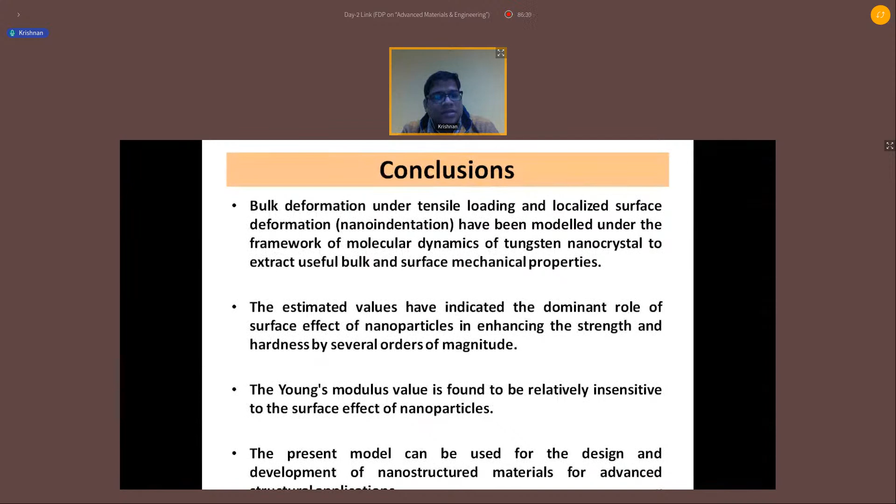Another part we tried in our lab is synthesis and characterization of tungsten nanopowder using high energy ball mill. Many people are making it through chemical routes, but we are using the simple high energy ball mill method.

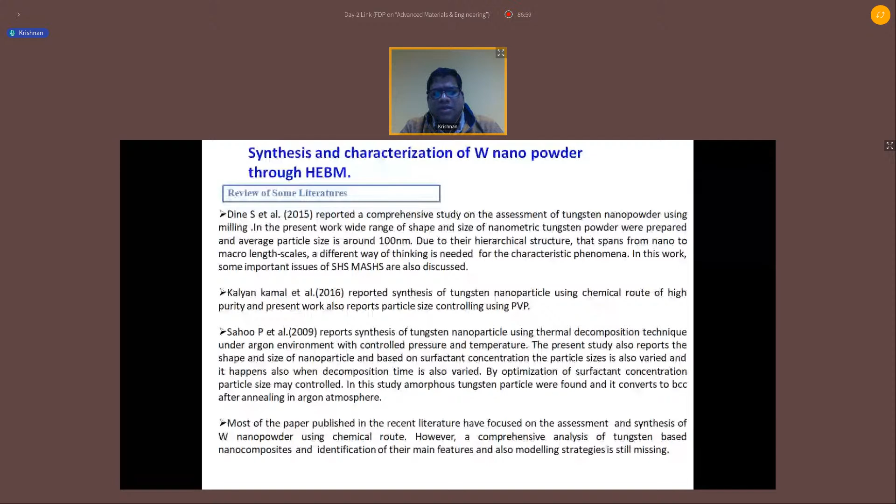Basically we have to add copper as a bulk, and we have to reinforce it with tungsten nanopowder to enhance the thermal property, because we know the thermal conductivity of tungsten is also high, and its melting point is also high.

Bulk copper as a matrix can be reinforced with tungsten nanopowder through not only the powder metallurgy route but also stir casting. But in our lab, the stir casting route requires a large crucible size, and we know when we produce any nanoparticle at lab scale, the amount is very small. So if we reinforce 5, 6, or 10 grams, getting uniform particle size and controlled properties through reinforcing is very difficult. So we are using pressure compaction, and after sintering, we obtain the material.

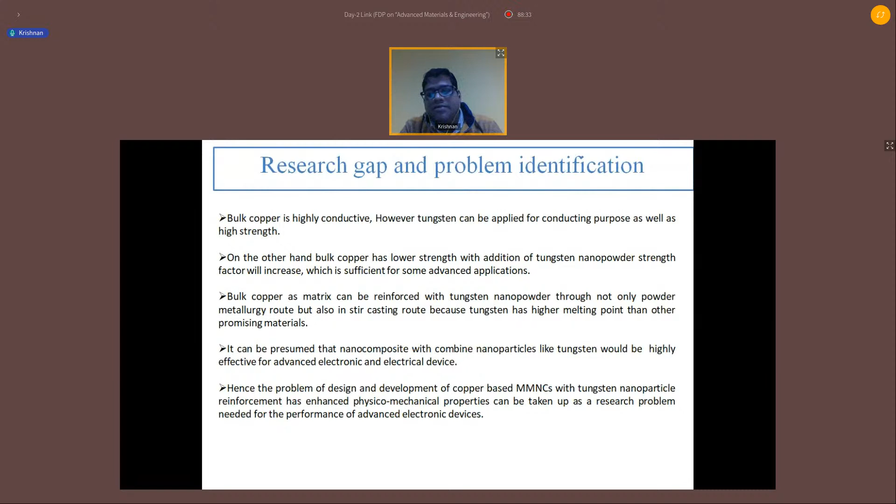It can be presumed that the nanocomposite with tungsten nanoparticle would be highly effective for advanced electronics, first for structural applications, and later when we synthesize the material for advanced electronic and electrical devices. Hence, the problem of designing and developing a copper-based metal matrix nanocomposite with tungsten nanoparticle reinforcement for enhanced physico-mechanical properties can be taken up as a research problem needed for the performance of advanced electronic devices.